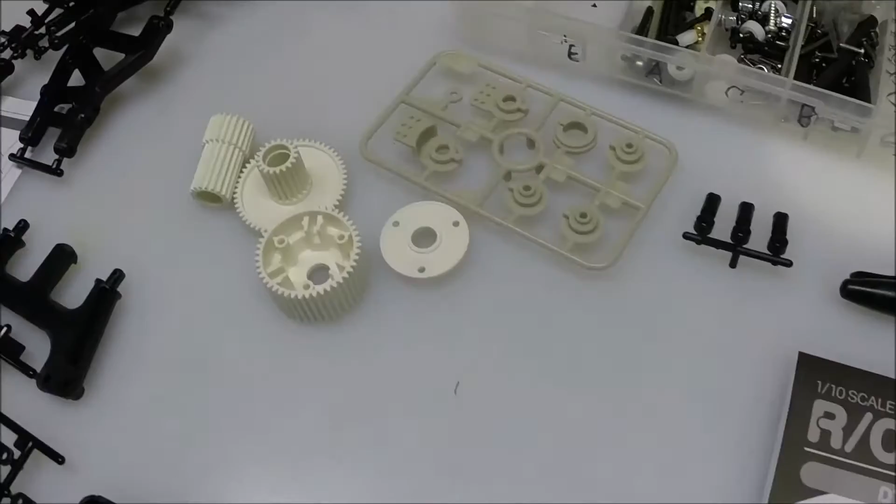So at the start of any kit you build, you need to go through and sort all your parts out and open everything up, and you have to have a good workspace. Whether it's a kitchen table or a card table, you need a place where nobody's going to mess with anything, and you don't have to worry about screws rolling away and falling where you can't find them. So I got all the parts laid out, and this is standard procedure.

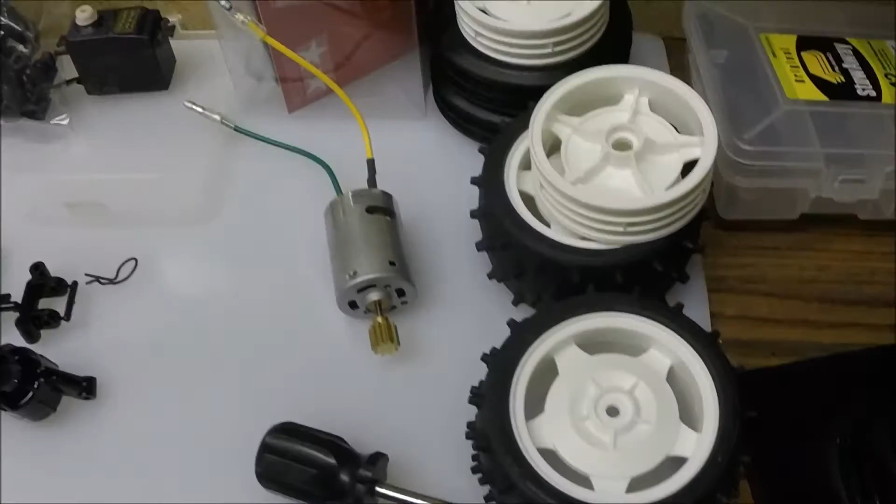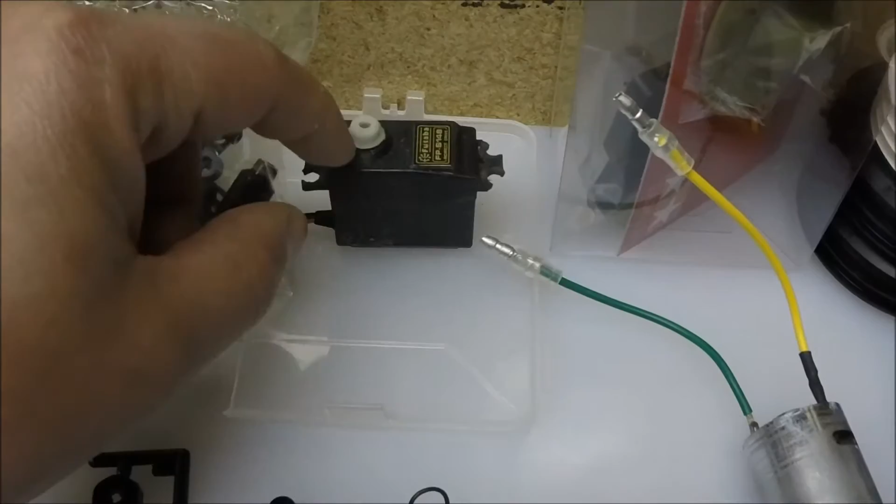The body is in the box, there's the wheels. I'm sorting out what I'm going to do as far as paint on this. I got my last extra parts servo, a Futaba servo, that I'm going to use for this kit. After that, I'm out of extra servos. I just used three of them that I had laying around for the last three kits I did.

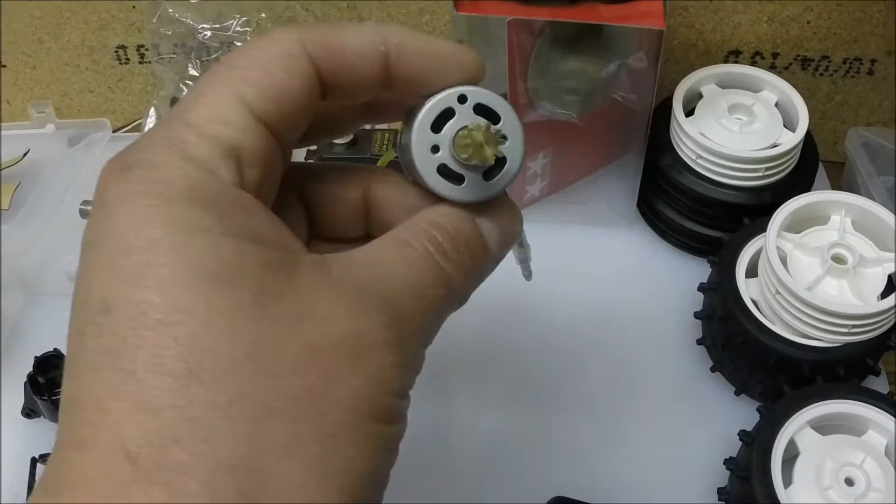We got the cute little 380 motor put in here, which is going to be perfect for Grace, entry level, and it's going to be real snappy. It's got a tiny pinion, so it'll be real snappy out of the hole, but then it levels off really fast. It doesn't have a high top end, which is good.

I got all the parts laid out on the table here, all the screws, bags A, B, and C sorted out in compartments which I've marked A, B, and C. That's how I do the Tamiya kits.

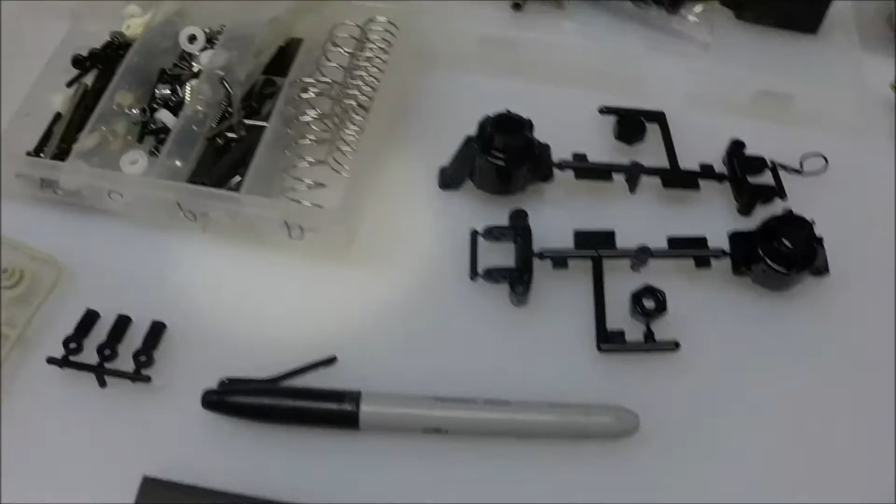There's really not a lot of parts in this kit, and it's going to be a fairly easy build. I like the chassis, it seems like it's going to be pretty stout and built well. It'll be perfect for her for a first RC, and it actually says on the box, great for a beginner first time build. So this will be pretty cool.

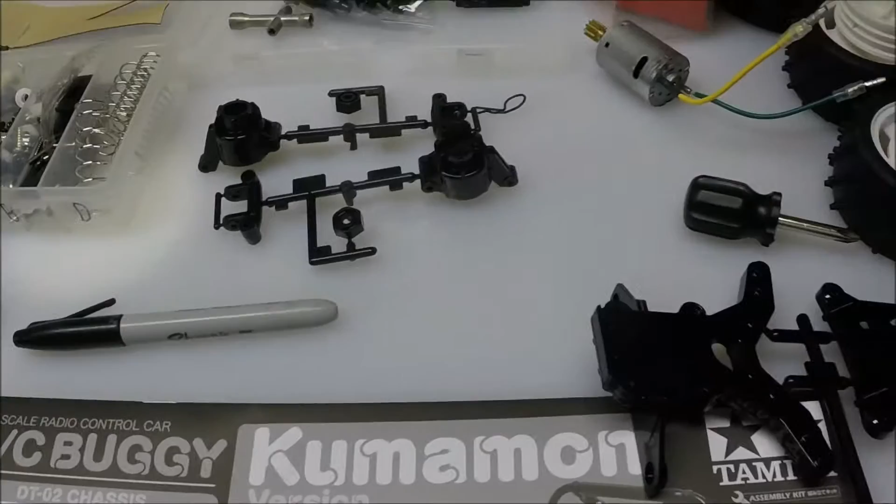I think that's about it, just wanted to talk about the parts here. Here's the little bear, which you saw in the unboxing, if you watched that. She's excited about that. So we are going to get on to the first part, and I'm going to start putting this bad boy together, and then I'll check in every so often.

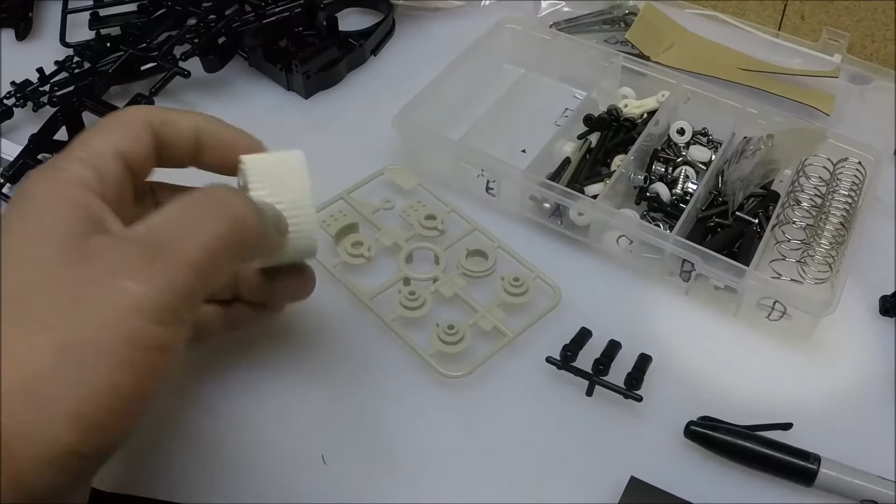One thing I noticed is the differential has a similar gear setup, exactly the same as the CC01 has. What I'm going to do is lock out the rear diff on this. They come with a limited slip diff, but I'm going to lock the differential on the back, kind of like a positive traction rear end. It'll help her a little bit since she's going to use this with us on the trails, on the light trails. It'll help her get through a little bit more than a limited slip diff would.

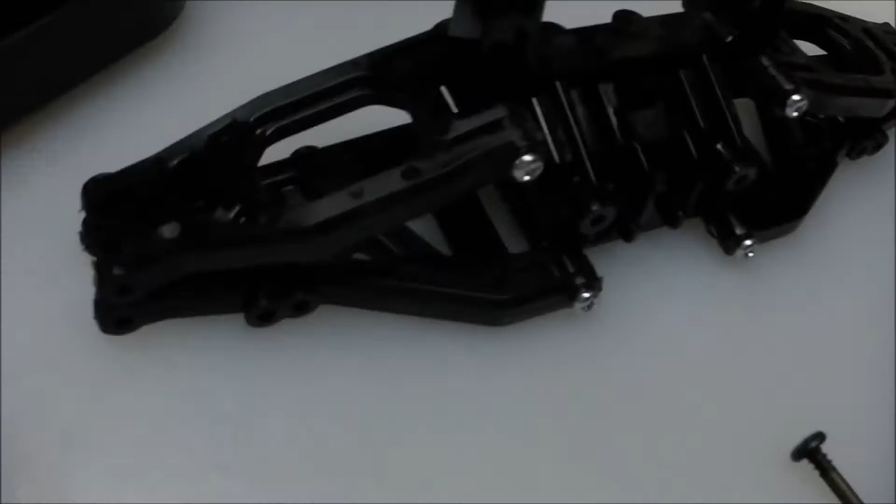All right, check back. Working at step 1 here, 1 is actually charging the battery, so it would be step 2. Working on the A-arms, the front A-arms. They show you the screws to put in, with a little note showing the arrow facing forward, which we have. These are just screw pins, they don't even thread in there. I'm not sure how that's going to work out, I'm guessing in a step coming ahead they're going to be trapped some way.

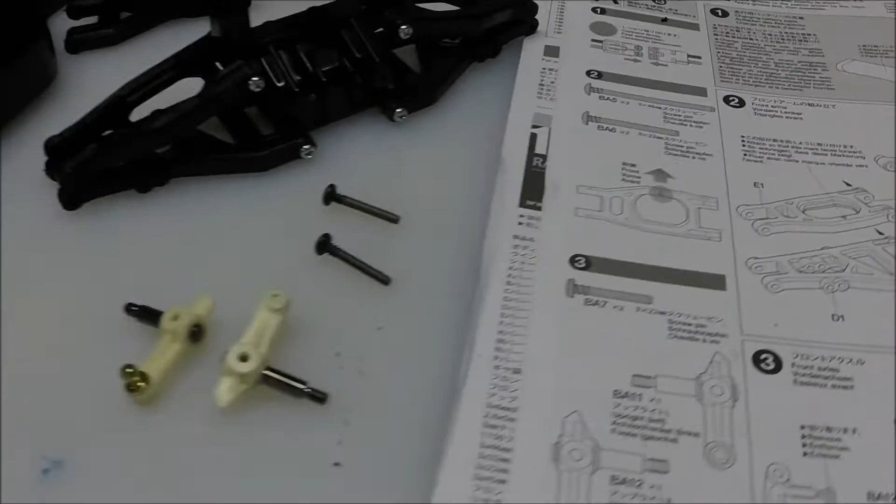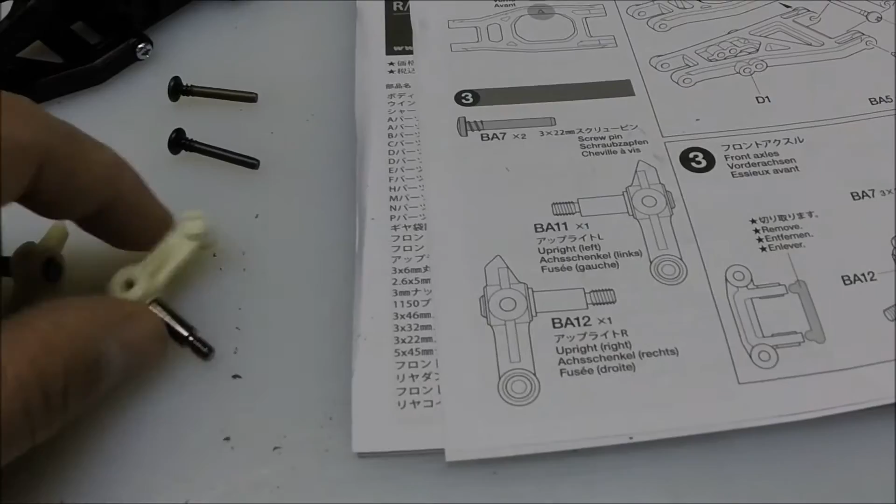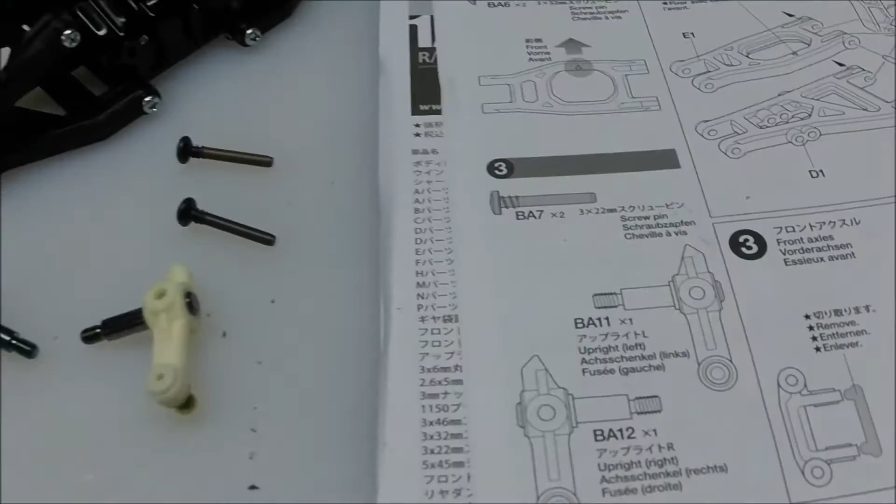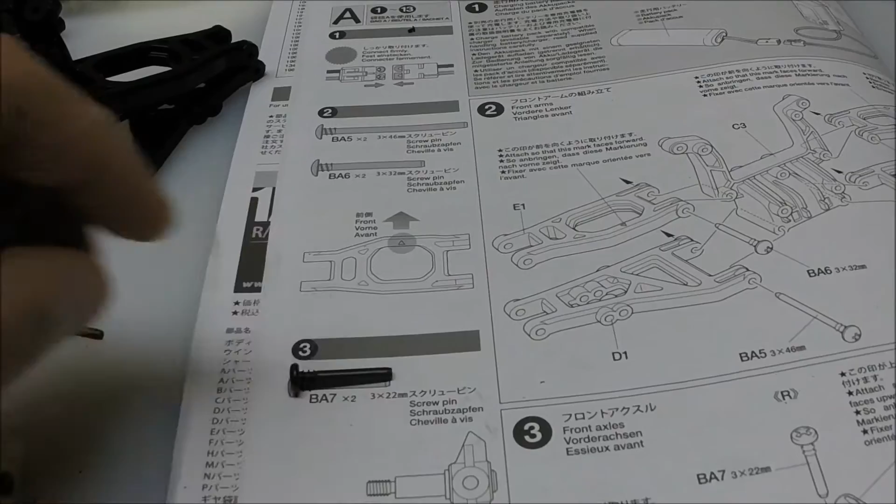Going on to step 3, just so you have an understanding of how the Tamiya kits work: you look on the side here, it shows bag A number 11 times 1, bag A number 12 times 1 because they're right and left. Then it shows bag A number 7 screw times 2, called a screw pin. You go into your divider where you've got bag A, take it out, hold it up to the piece, and you can size it and it matches exactly perfect. Then you know you got the right piece. That's what's cool about Tamiya, all their screws and fasteners are actual size, so you can pop it up there.

So I'm going to work on this front suspension a little bit and get this together, and I'll check in a bit. All right, checking back in here.

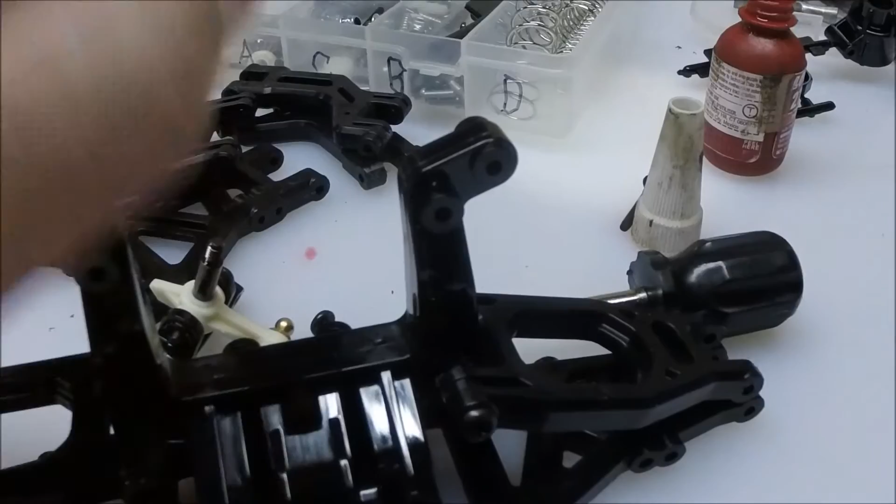I had a little mistake here. I had these screws, and I just looked real quick and saw B, and I held it up thinking that's it, close to the size. But it was actually bag A. I just looked at it quick and popped in the wrong screws, and they were loose because they didn't catch. I realized the screws came out of the other bin, so they were from bag A. I got the right ones in there, getting ready to put on the outside.

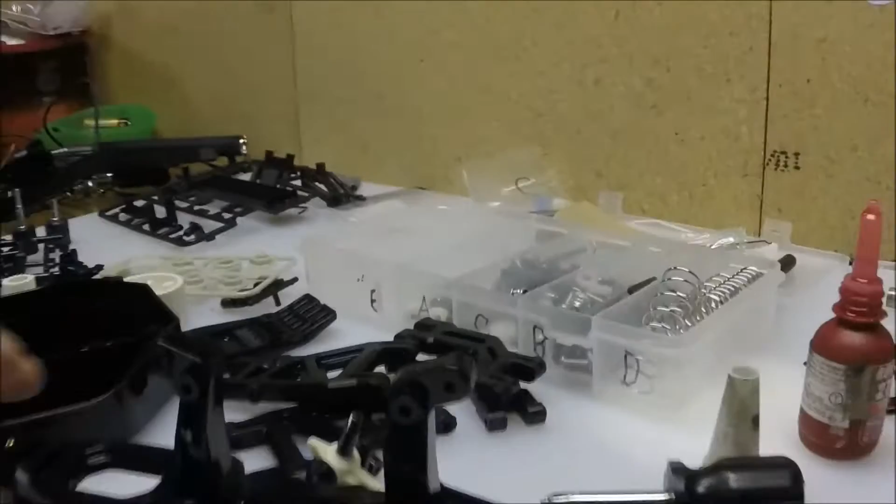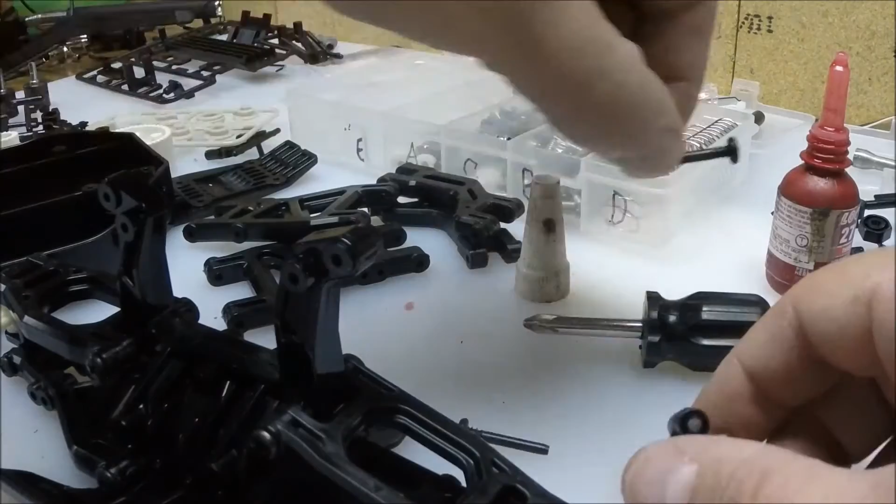Steering linkage here, so this will go on like this. Got these screws right here. I don't like to show too much of just putting stuff together, because it gets kind of boring watching me pop stuff together. So pop that in there, pop this screw down here, and then we'll pretty much have the linkage, or the A-arms, all set.

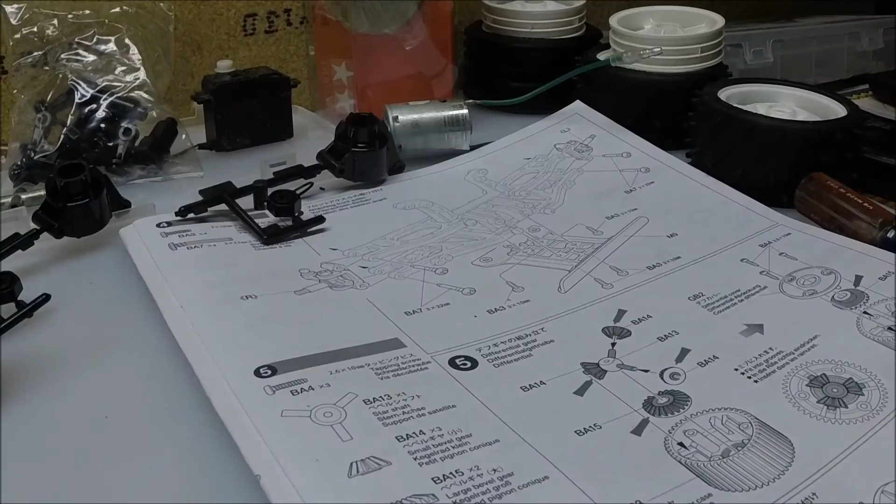Run these bad boys up tight. This looks like it's going to be a relatively easy kit, like I said. There ain't too much to it, which is good. It's a good, perfect beginner kit. So just wanted to show you that. You got to be very careful that you pay attention to the instructions and don't mix up a fastener or something. Next step is gears.

All right, YouTubers, checking in here. Got the A-arm assembly all put together, it's all ready to go. Hub carriers, so I'm going on to the gearbox now.

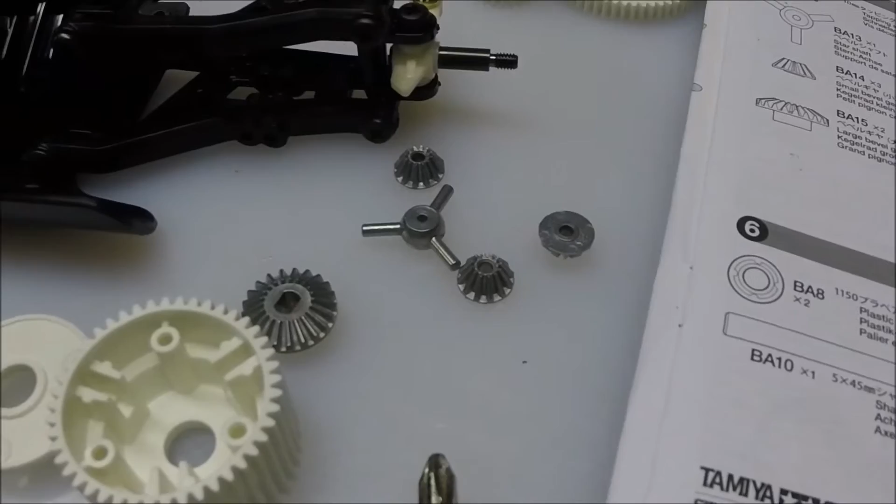You can see I got all the parts laid out for the gearbox. What I'm going to do is lock this thing out, and I have spare bevel gears from the CC01 that I'm going to use to do that, and then this will be a full-on positive traction rear end, so that'll be pretty cool. But I actually made a mistake on here when I was first piecing this together, and it wasn't a big deal because they didn't even thread in there. I just put them through there, and thought, man, these are loose, they're not catching.

But I matched up the wrong screw. I looked real quick and thought it was bag A, and this screw was very close, but it was from the wrong bag. So I told Josh from Midlife that if I ever make a mistake, I will video it. So I'm videoing it right now, and I just pulled them out and put the right screws in, no big deal.

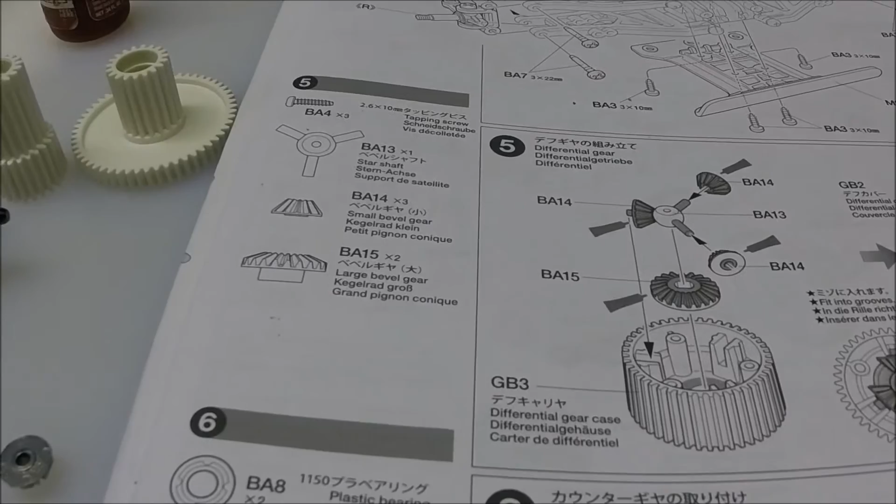Just a reminder that when you're building these kits, you can't get distracted. The phone rang when I first started, and I was talking for a little bit, and then I got back. You need to have peace and quiet and really study what you're doing. I do anyway. Some people can carry on full conversations and talk throughout the whole build, but I do parts and then pan away and come back, because you have to pay attention closely to what's going on, especially in the gearbox.

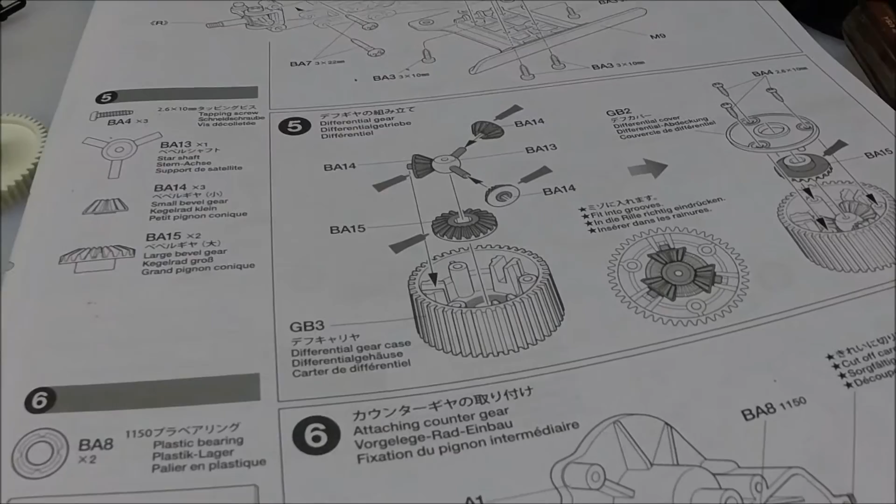If you miss something, a pin or a gear, or something's not in the right place, or you put the wrong screw in the front suspension, you're going to have problems, because later on you're going to wonder where that fastener was that you don't have, and you could have problems. So you got to really pay attention to what you're doing and take your time, and if you do that and get yourself in the mode of building, it's really pretty easy.

All right, so what you do here is you put the 3 bevel gears in there, and I got the spare parts from the CC01, so I'll show you. I don't want to handle the camera with the gears because they're greasy and everything else, but you have this little 3-star piece where the bevel gears sit on there, and then you drop this in, and it rolls around on the other bevel gear on the bottom.

Well, what you do is you take, if you can see this, there's 1, 2, 3, and then you take an additional bevel gear, which I left over from the CC01, and you drop it down inside between these 2 gears, and it jams up the whole assembly.

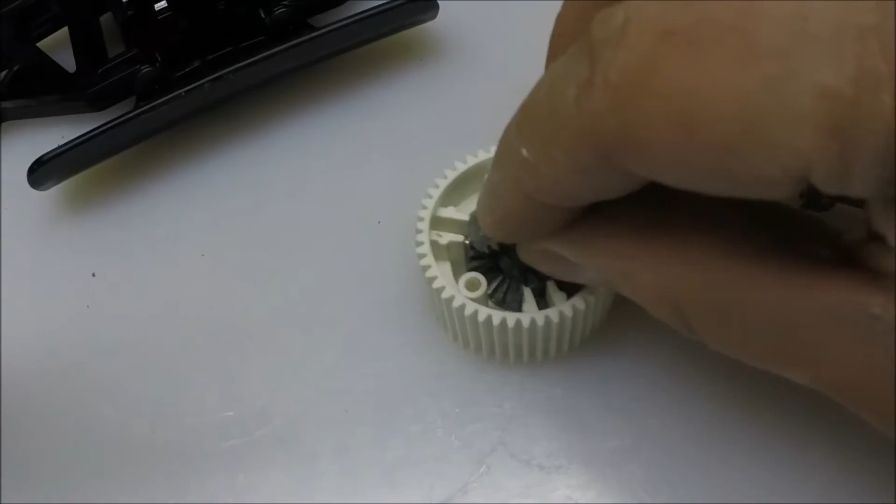Then you take your other bevel gear and stick it on the top side, get that thing centered up, and then put this cap on there. What that does is lock the rear differential and make it like a positive traction rear end, since this is only 2-wheel drive. It'll lock both wheels so both spin the same instead of having a limited slip.

So I don't know how it's going to work out. Worst case scenario, if I don't like it, you pop it apart and take it out, but I think it'll be pretty good. It'll give it a little bit more ability to get through some stuff off-road.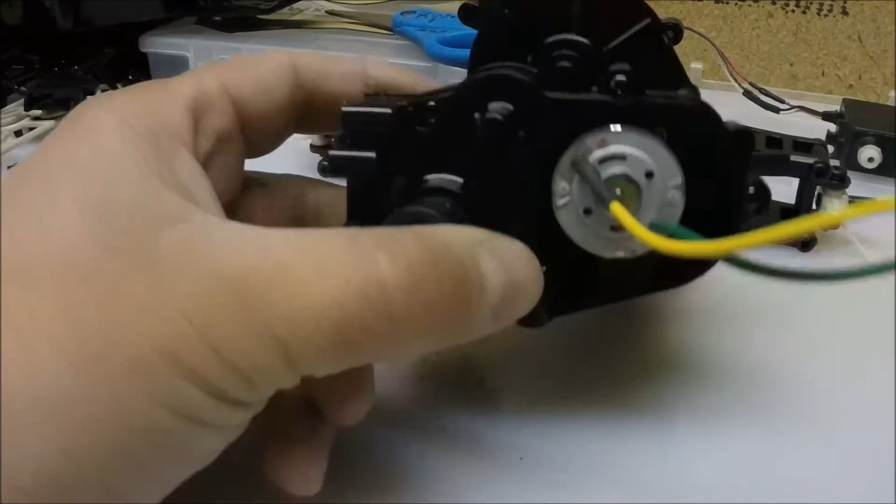All right, checking in here. It's got the gearbox all put together, and like I told you, I locked the differentials out. I apologize for the noise, guys.

In the wintertime, my furnace is directly behind me along with the hot water tank, so obviously today it's about 16 degrees, or below 0 I guess with the wind. So the furnace is running quite a bit and it's noisy, so I've got to talk a little louder.

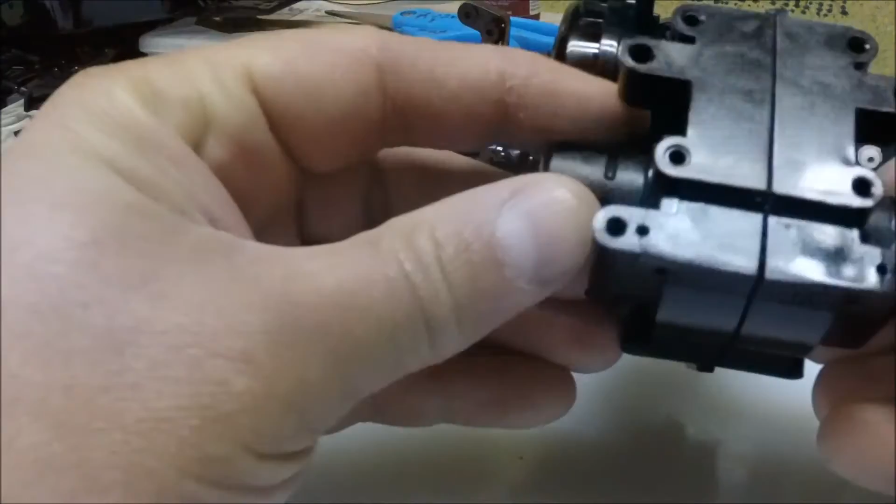Normally if I hold this left side and go to turn this to the right, it would spin the opposite direction because it would be a limited slip. But we are locked, it's fully locked. You see I'm turning and it moves together. It's fully locked, so I wanted to point that out.

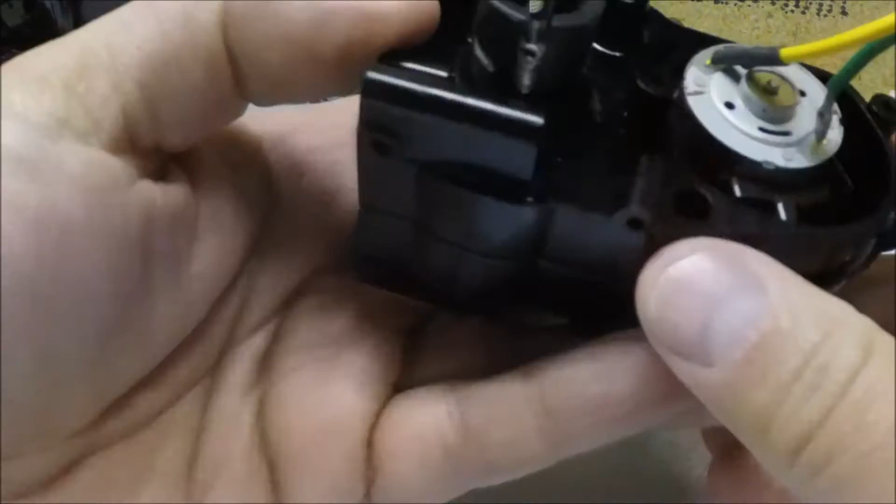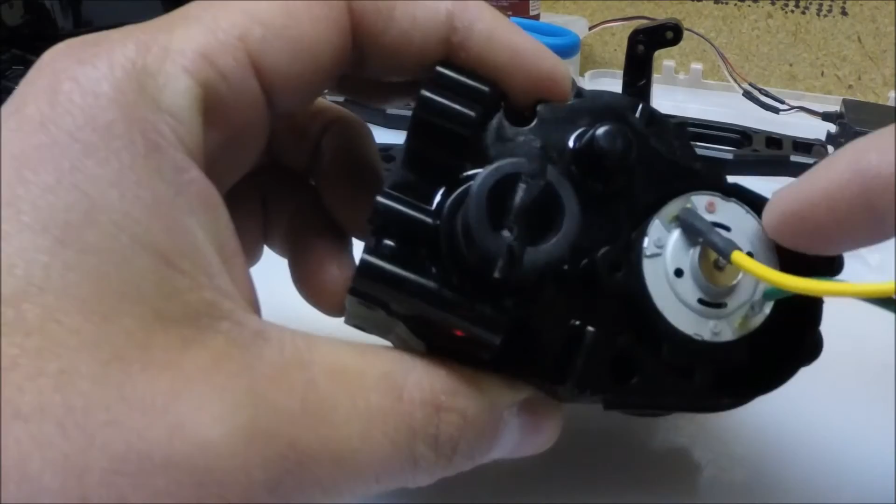This setup on this motor was kind of a pain in the butt. It's got a motor plate adapter they put on there because this comes with a 380, and normally I wouldn't even bother with the 380, I'd put the 540 in it. But because it's for my daughter and it's a beginner's vehicle, her first hobby grade, I don't want a ton of speed. The 380 gives it a lot of punch off the line and then it kind of levels out. It doesn't have a high top end, which is perfect.

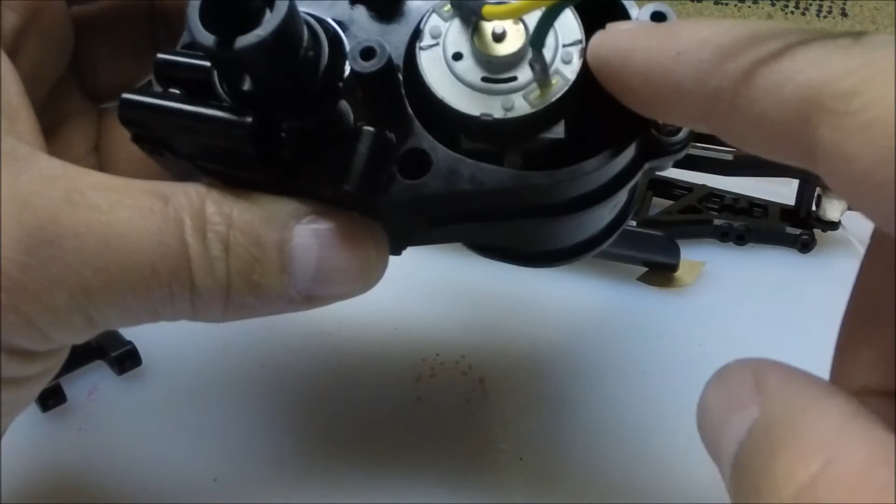But it has this adapter motor plate inside there, and it has nuts that press into plastic, and then the mounting bolts come through the backside, and they just come through enough so they catch the nut and don't hit the motor. And then on the bottom there's like a little plastic plate with double-face tape that you stick in there. It's almost like an additional support or shim for the motor to fill this void.

That was really a pain in the butt to get those screws in on the other side to line up and thread in, because they only make a couple threads, and you had to get this thing in the right position. If it was in the wrong position, it didn't want to make up, so I had to mess with it a little bit, but we got that all complete. And then the front, you saw the front, so now the next step is going to be to put the A-arms and everything on the back end of it.

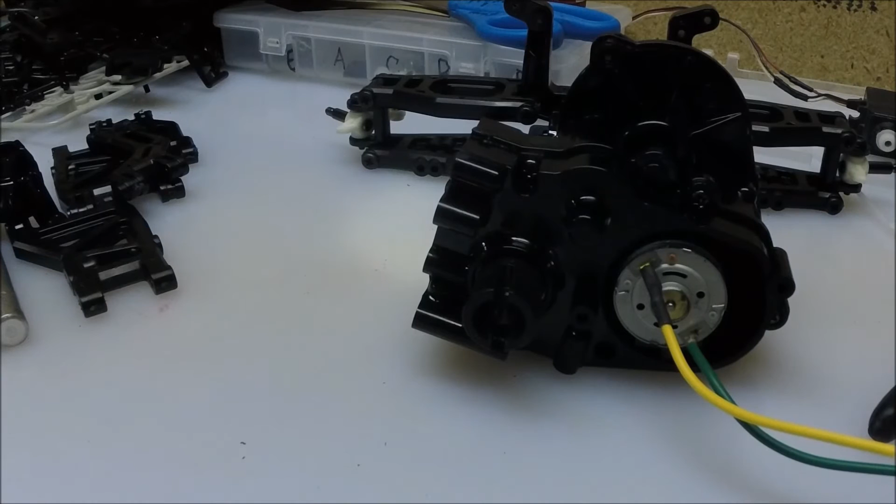So this is a relatively basic build, and Tamiya kits are all awesome to build. The instructions are great. You just really have to take your time and go through the steps cautiously, and it's very hard to shoot a video the whole time when you're building.

First off, nobody wants to watch you put every screw in, and you could speed through and just show real quick how you're putting everything together. A lot of guys do that too, it's kind of cool, you can see the phases. I myself like to do little steps, go through the book, do steps, and then talk about what I did, what parts I did, and then break away and come back.

As it is, my build videos are normally an hour long or so, because I like to do a lot of yapping too while I'm doing them. But you can see the parts that are left, there's really not a ton left, and this is going to be fairly quick and easy. I'm already on step number 11, and I haven't been on it that long. There's just not that much stuff to it, which again makes it a great beginner friendly Tamiya kit to build.